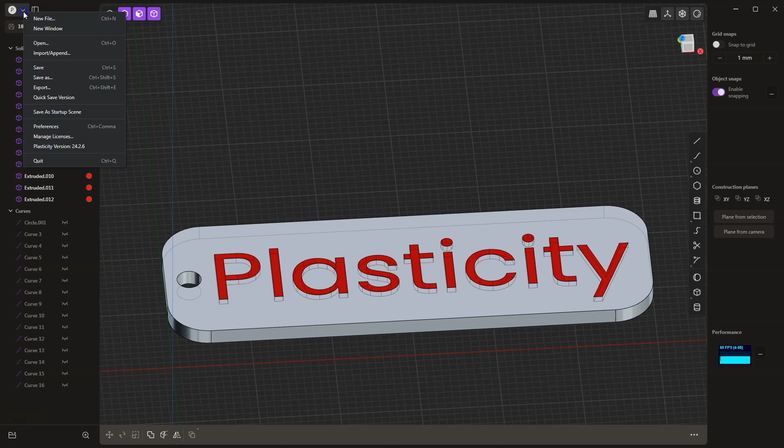I'll now move on to a new file. We will start by creating a rectangular box. Select the box creation option and create a rectangular box measuring 60 by 25.

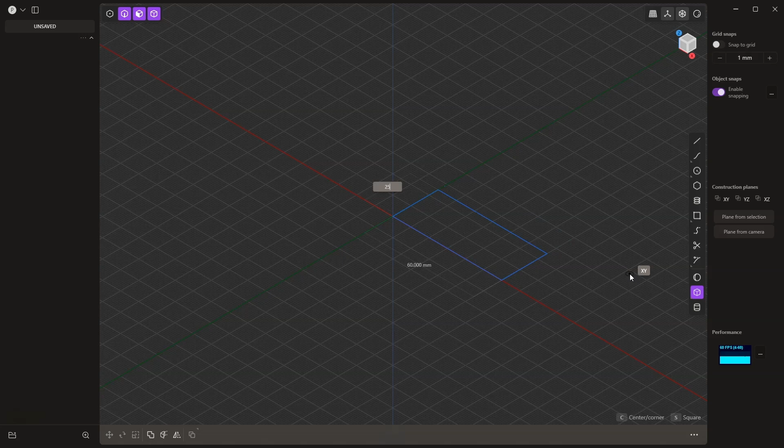As for these dimensions, we can adjust them later if necessary. Hit enter. For the height, press the H key and let's set it to 2 mm so it's not too thick, or we can even set it to 1.5 mm. Press enter. Of course, if you want, you can create a thicker element.

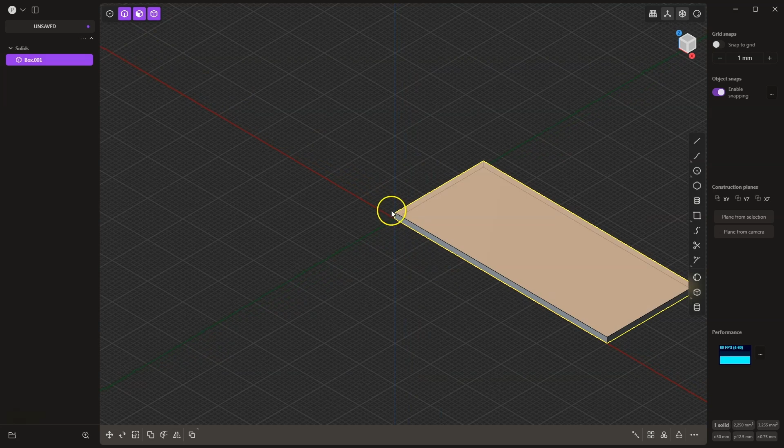I want it to be relatively thin so that it can be printed quickly on a 3D printer. Now I will select the corners of this rectangular box. I press the 2 key to activate edge selection, and holding Shift, I select the 4 edge corners of this rectangular box.

Let's create a radius of 5 mm, so I press the D key, type 5, and press enter. Enter again to finish that.

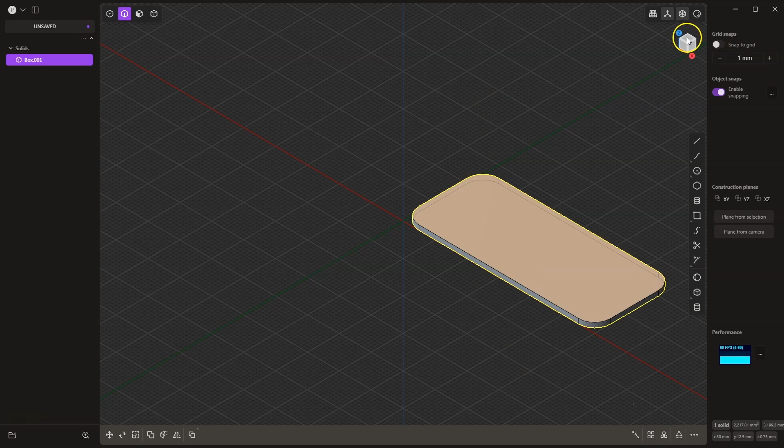I switch to top view and select the circle drawing tool. I will create a circle here with a diameter of 3 mm.

Now I will move this circle a bit inside the solid. I activate the move command by pressing the G key and move it by 3 mm. We can drag it approximately 3 mm or specify a specific value for the move.

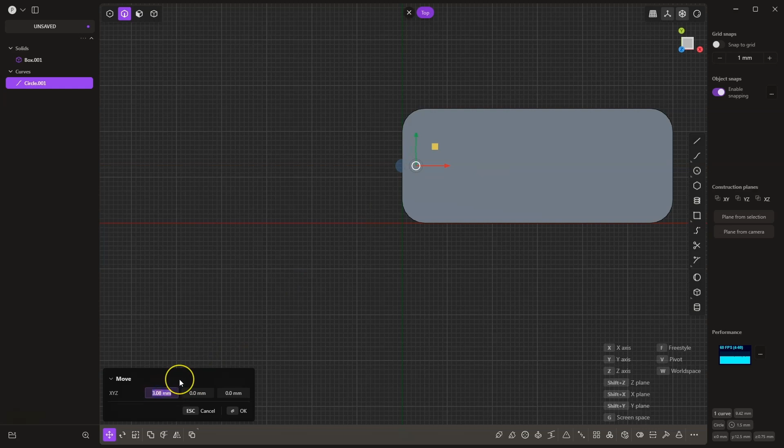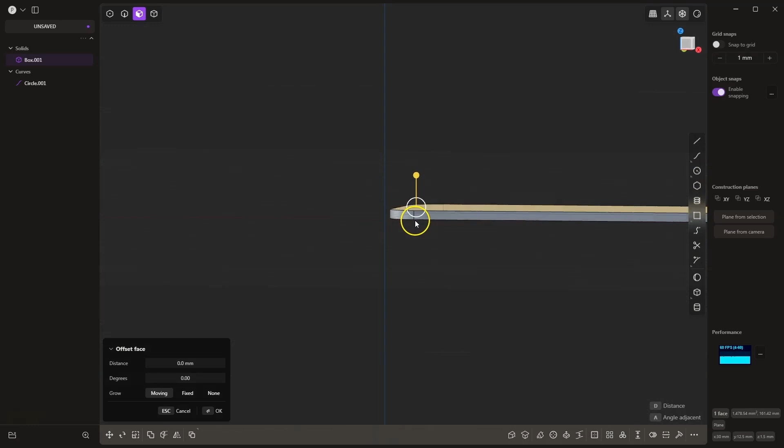Now, based on this circle, I will create a cutout in this solid. I switch to face selection mode and select the area of this circle, but this circle has been created as if inside the solid. I will temporarily turn off the visibility of the solid.

I select this circle and add an extrusion in one direction. I press the Tab key so that this extrusion is added in the other direction. I turn on the visibility of the solid.

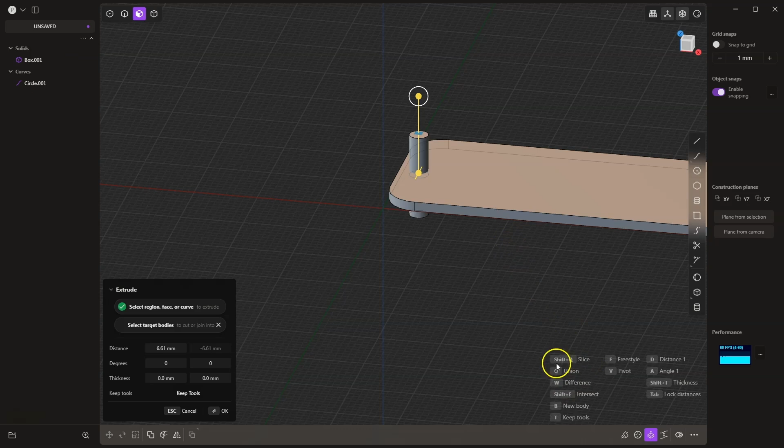I press the W key to specify that I want to remove material based on this extrusion, and select this solid as the one we are subtracting material from. I click OK to confirm and turn off the visibility of the flat geometry. We already have the base of this keychain.

Now I will create text. I press the F key, type the text, select this command, and here we will specify the text Plasticity. Let's just change the font, for example, let's choose this font.

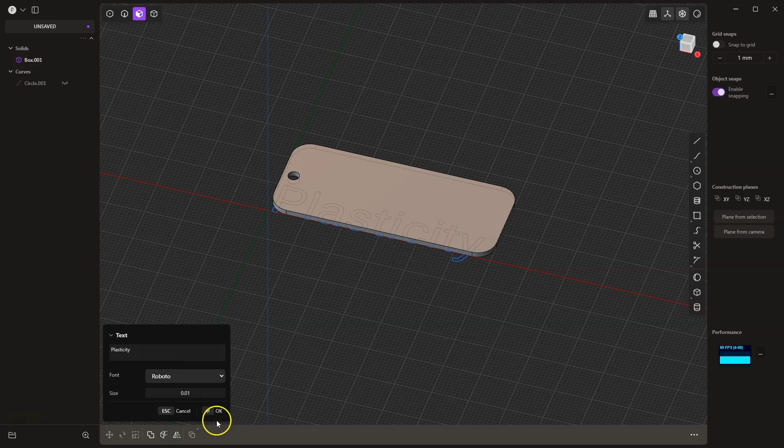As for the text size, we will reduce it a bit. Okay, maybe a little less. We will leave it like this, and I click OK.

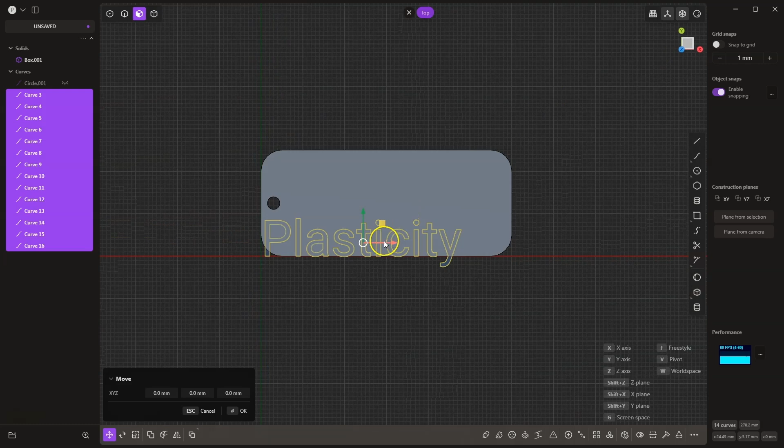Now I will switch to top view. I press the G key to activate the move command, and I will gently move this text. I click OK, and we will leave it like that.

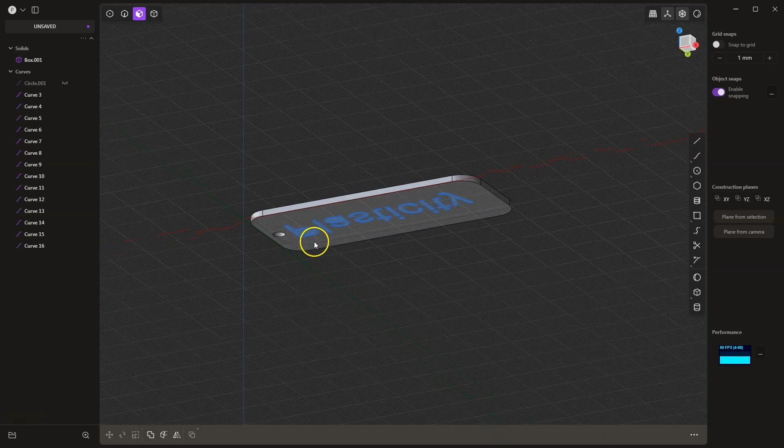This text has been created at the bottom, so I select all the flat geometries. With the Control key, I deselect the circle and activate the move command again. I press the G key and move it 1.5 mm up on the Z-axis, meaning I press Z, type 1.5 and hit enter. Enter once more to finish that.

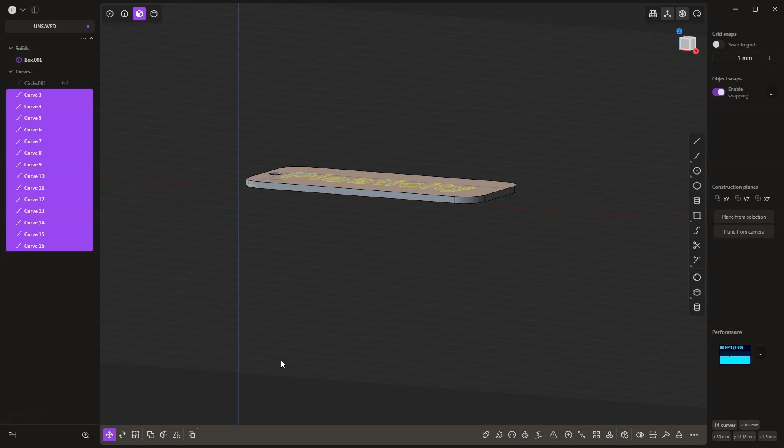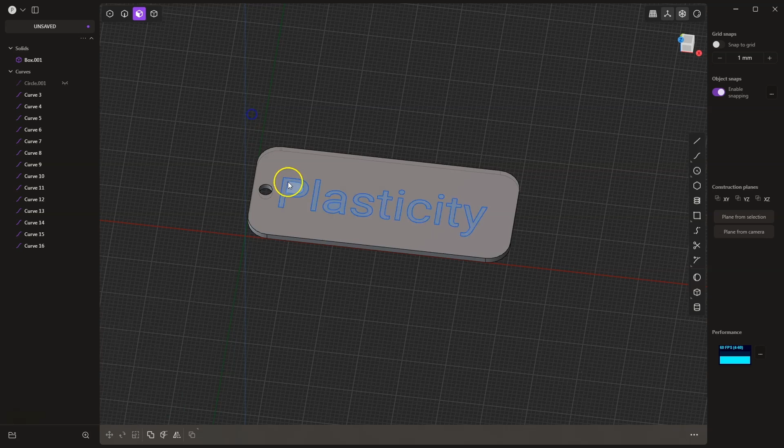Now, all the areas of the letters are already selected, but we can do it in such a way that we switch to face selection and select all the letters using a selection window. With the Control key, we deselect those areas based on which we will not create the extrusion, or we can simply hold Shift and select those areas based on which we want to perform the extrusion. We'll just click each area one by one.

Here it's easier to do by using the selection box, and with the Control key, we deselect those areas based on which we do not want to create the extrusion.

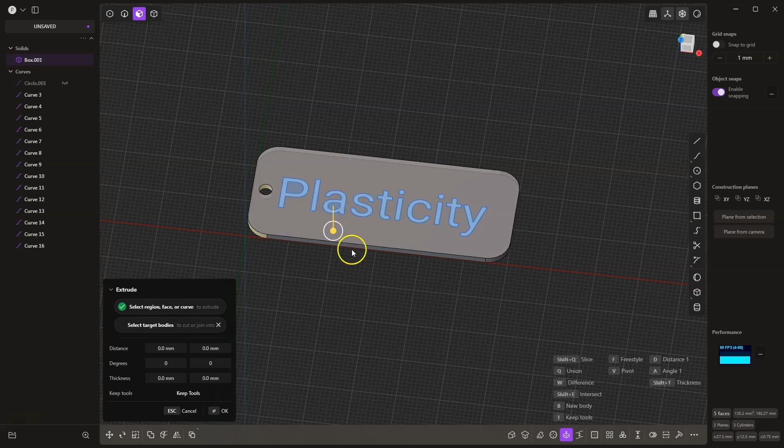Let's add an extrusion of -0.48, so I type D minus 0.48. You can see this didn't work. I'll try to drag this marker. Okay, this didn't work because the last selected area is the area that I deselected.

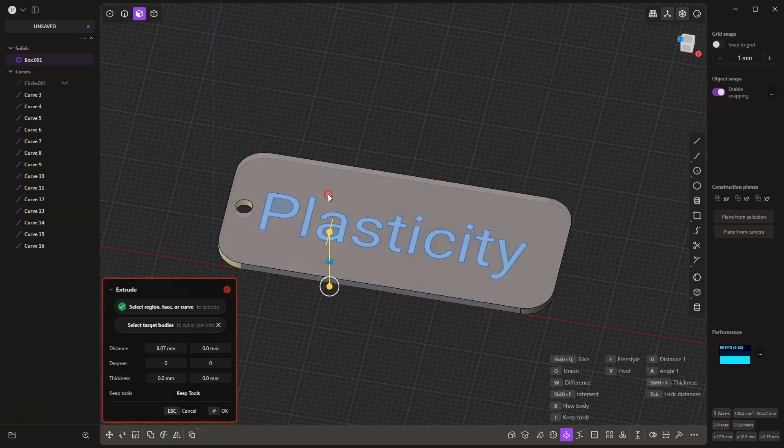Now we will do it again in a similar way. Again, select the areas with a selection box, and with the Control key, deselect those two areas. Now again, the last selected area is the one based on which we will not do the extrusion. So now I press Shift and click on this area. I type D minus 0.48.

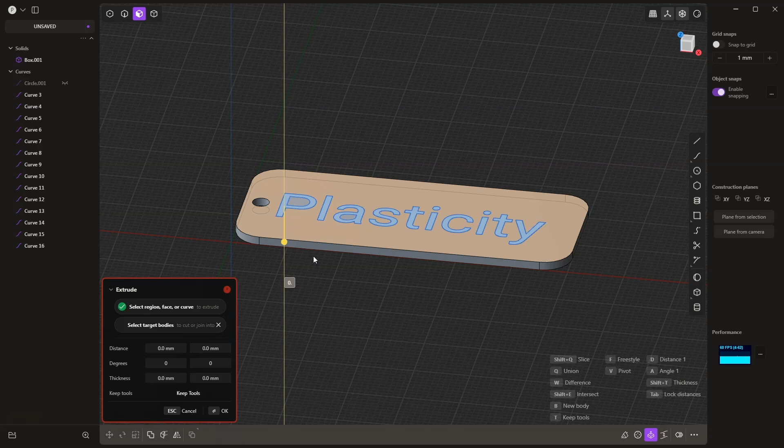Here it has been performed upwards, so I will undo that and simply type 0.48, because here the extrusion was directed downwards, and in that direction I want to add this extrusion. I click OK. Here the solids have been created.

I will turn off the visibility of the flat areas. We have created solids in such a way that they are inside this plate, but if I turn off the visibility of such a solid, there is no hole in this plate.

To do this, I select the first solid in the outliner, which is the solid from which I will subtract the other solids. Then, holding down the Shift key, I select the last solid to select all the solids. Now these solids are selected, with the first being the solid from which I will subtract, and the rest being the solids I will subtract from it.

We can also do it in such a way that I switch to solid selection. I select this solid, then with the Shift key, I select the other solids that I want to remove from this solid. We can also do it using a selection box. We have the solids selected. I activate the Boolean operation by pressing the Q key on the keyboard.

Here a solid subtraction has been created. If I click OK, the solid letters will be removed, and that's not what I want, so I press Ctrl Z.

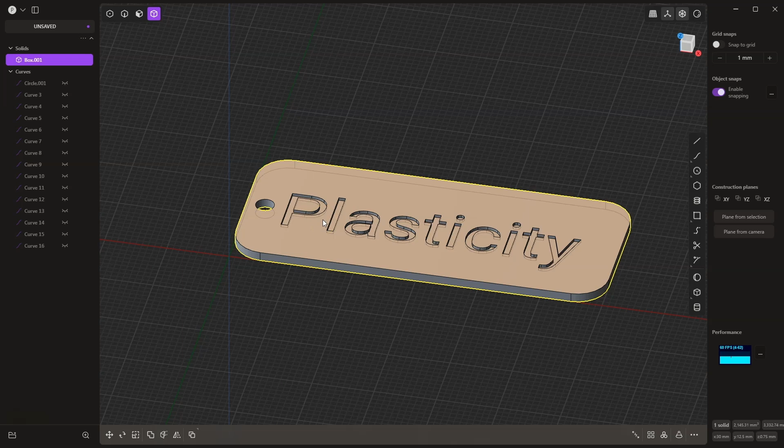I already have those solids selected. I press the Q key again. I want the letter solids to remain in the project, so I click this Keep Tools button and click OK. Now it looks like this.

At first glance it might seem that nothing has changed, but now when I turn off the visibility of a letter, we simply have a pocket created based on that letter.

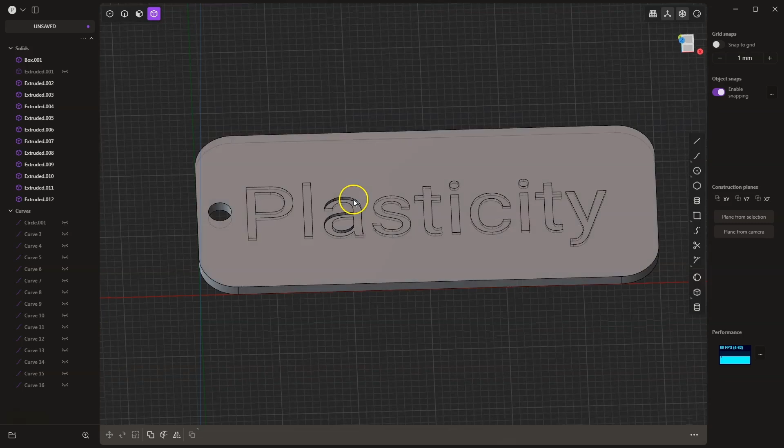In this case, we have a multi-object solid, and when it comes to preparing multicolored prints, I do it just like this. I simply create a multi-object solid, and then in Bambu Studio, I color these objects. I will show you how to do this shortly, but I will adjust this solid a bit first.

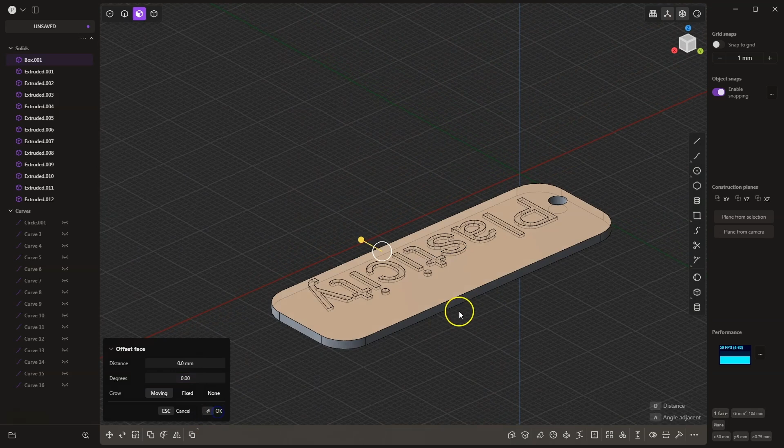I switch to face selection. I select this face and add an offset of, for example, -5 millimeters. We will do the same on this side, also -5, okay? And one more from this side. Let's also do this at -5.

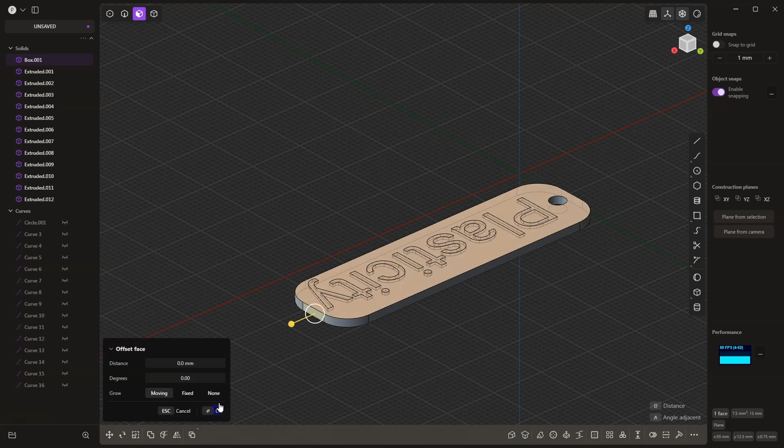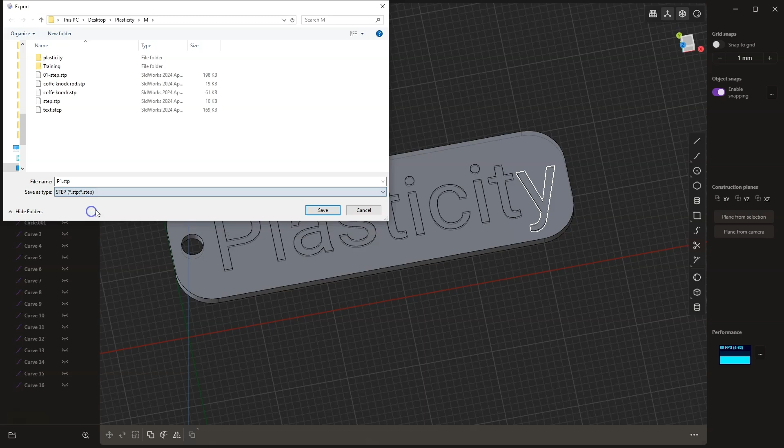Now I will export this solid to the STEP format. I specify the name and choose the file format. I click Save. Here we specify the type of STEP file. At this moment it doesn't matter much, we can leave the default. I click OK. Now we will go to Bambu Studio.

I will add this model to the project. We have something like this. As you can see, all the solids are in one color. Now, to color these solids, I go to the Objects tab. I have the individual solids here. The last solid is the plaque.

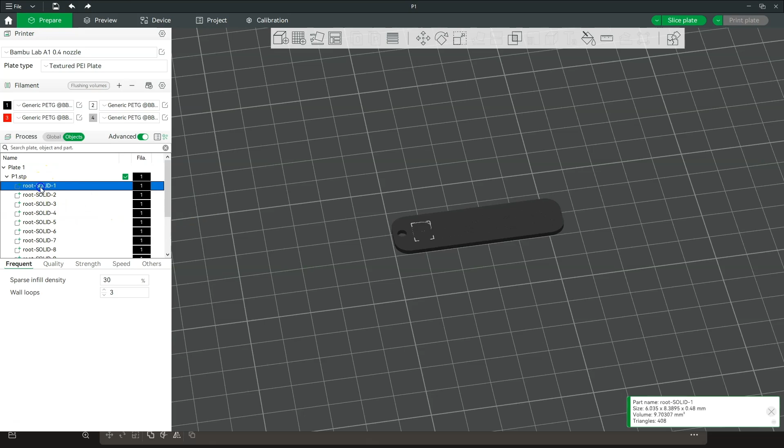Now I will select the remaining solids. I click on the first one, hold down Shift and click on the last solid I want to color. Then I right-click and choose Change Filament for selected items. Let's choose the red color, and in this way we can color the solids.

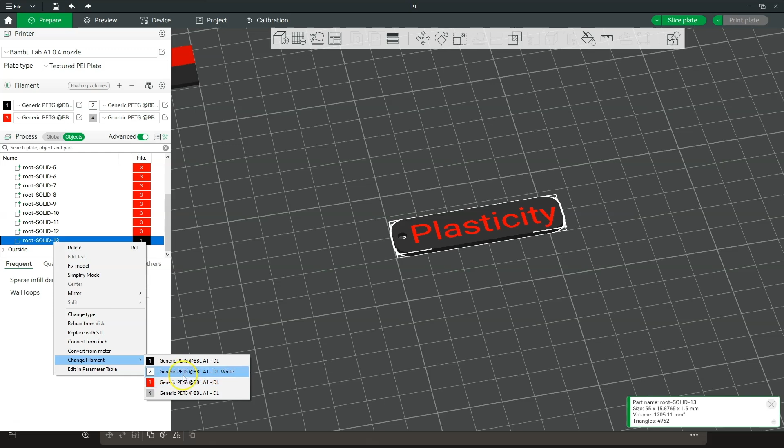If you would like to change the color of one solid, you select that solid from the list, right-click, and specify the color of the filament from which this solid will be printed. Okay, we can do it this way.

Here, I already have the colors specified that I use in AMS. If you want to add a color, you click this button. If you would like to remove a color, you click this button. If you would like to change the type of material, expand the available materials here, and you can choose different materials.

As for what materials are available in the list here, we can specify them by clicking this icon. We just choose the filaments we are using and would like to use, and then we can indeed use these filaments.

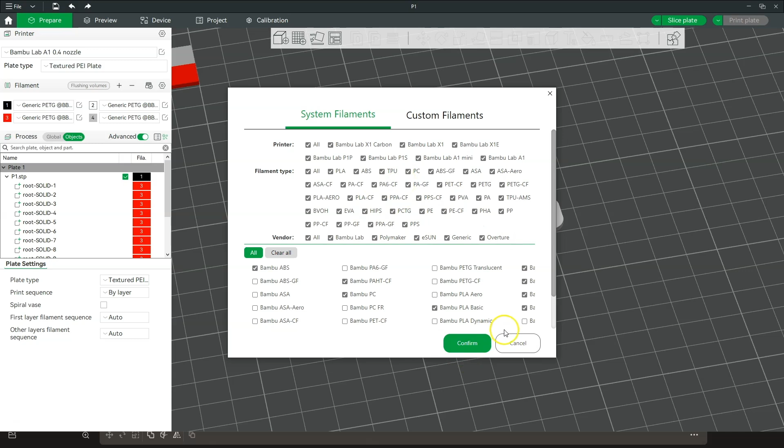If you would like to change the printing parameters and change these default profiles, click here, and here you can change the printing parameters for that filament, for example, the temperature. As for PETG filament, you can adjust, for example, the cooling. As for the parameters of this filament, I usually use the default values. When it comes to PETG filament, I've adjusted the cooling values a bit here, lowering the cooling slightly, but as for the default parameters, I believe they are quite appropriate and you can easily use them.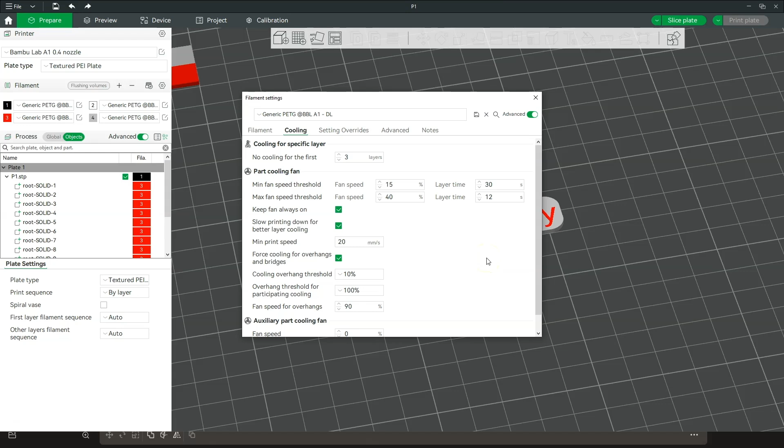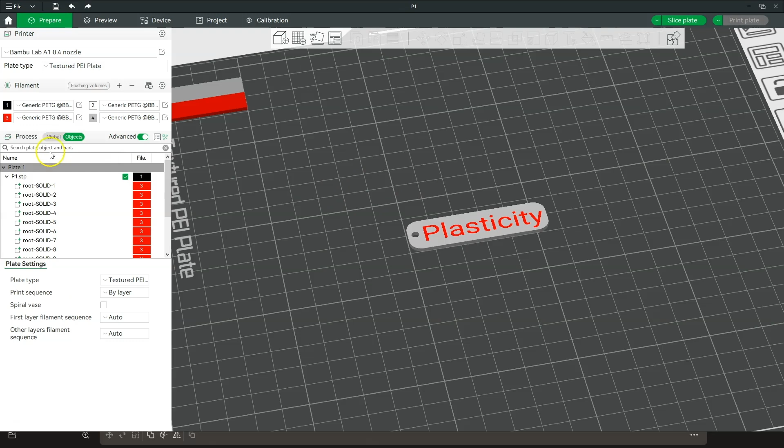Now, based on this model, I would like to get a multicolored print. I will do this by selecting the entire solid and rotating it 180 degrees around the y-axis so that the text is at the bottom. The text is now at the bottom and it will be printed as the first layer.

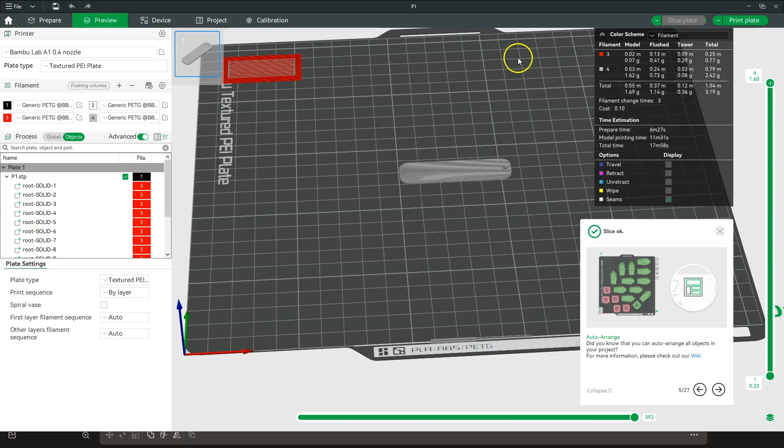I click the preview button and this is how it looks. The text will be printed on the first and second layers, and then the plate will be printed.

I choose this option here because I am using a memory card. Now by clicking this button, I will export the program to the memory card and then start printing on the 3D printer from the memory card.

In a moment, I will show you how it looks after being printed on the 3D printer.